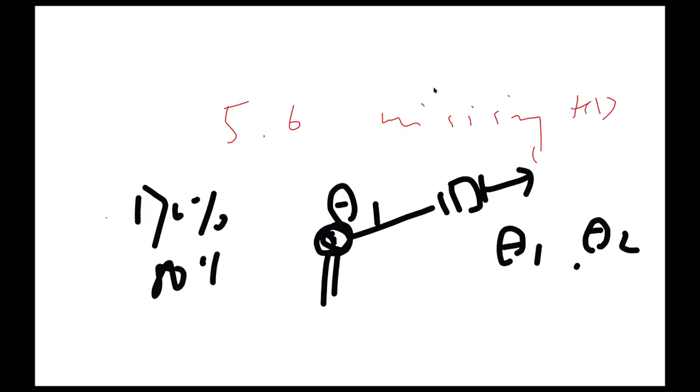We have a rotary joint, and then another one that's actually a prismatic joint. How come your Denavit-Hartenberg matrix has theta 1 and theta 2? There's only one theta, there's only a rotary joint. Maybe 70% to 80% of students in their homework 5 or 6 submission either miss the kinematic diagram, or they have the kinematic diagram but the Denavit-Hartenberg matrix uses theta 2. That's weird, you only have one joint, how come you have theta 2? So those students are completely not working on the material right now.

That's the part that's scaring me. Scary, okay, I actually got scared. Like the majority of the students are not even studying. That's the problem, okay.

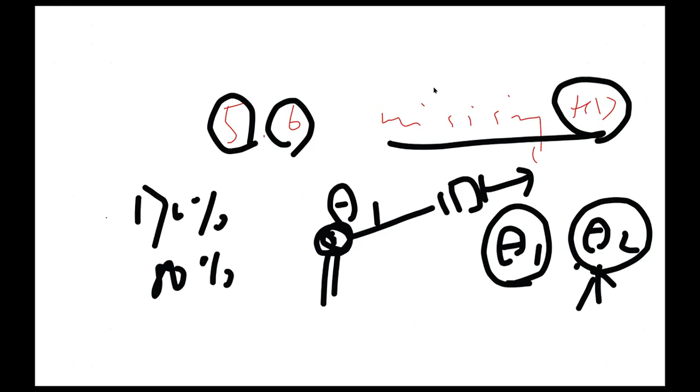So if you are a student who gave up studying, please work on it. This course is supposed to be an introductory course, and we've already tried to minimize the difficulty of the material. Also in terms of grading, I already made it very straightforward and simple. If you do work on something, even if you miss some numbers, I'm fine. I don't deduct points if you just have some minor issue in your coding or modeling. But if you totally don't want to try, then I can see it. Some students started to give up in homework 4, some started to give up in homework 5, okay?

That's not a good sign. In terms of so many years that I teach robotics, this class has the majority of students who give up early and just try to submit some garbage homework. That's the problem.

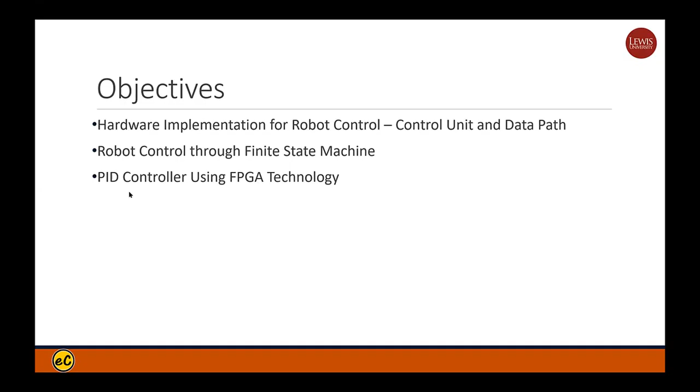Okay, so anyway, today we are talking about robot control through the finite state machine, and then the PID controller using FPGA technology. So first we talk about a finite state machine.

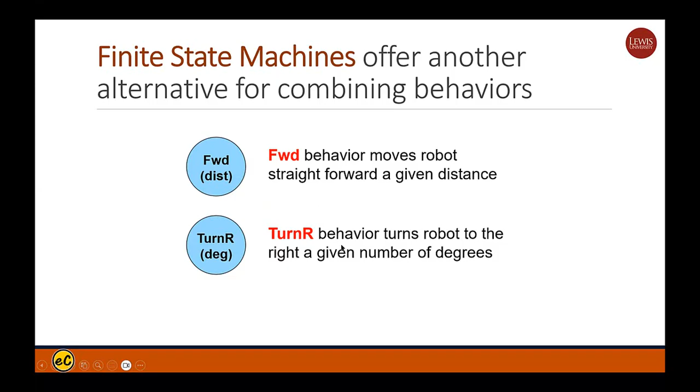So finite state machine offers an alternative for combined behavior. You have the forward behavior, you have the turn right behavior. Like this Pac-Man example, if you want to control it, it will go forward for 2 feet, then turn right 90 degrees, then forward for 2. So it's forward, turn right, forward. This is what will happen.

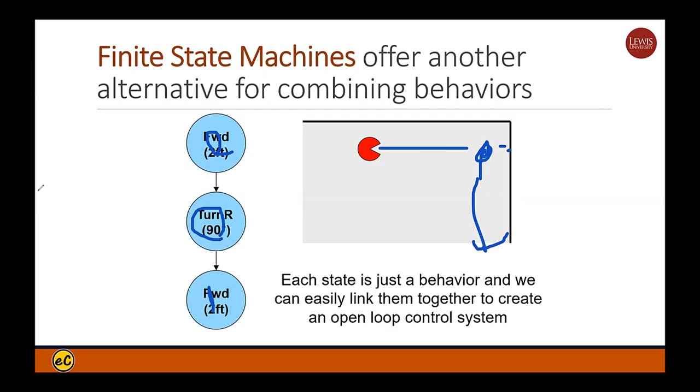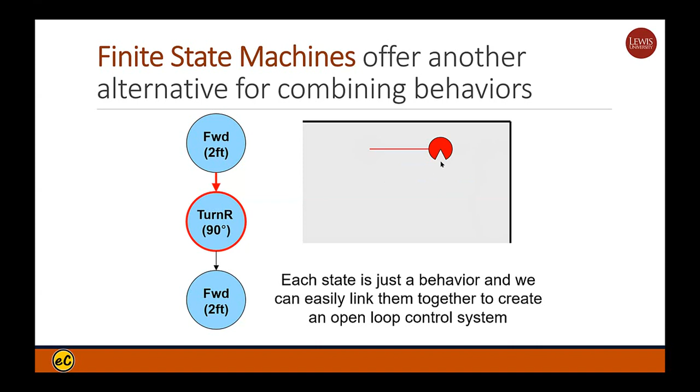And then there's a sensor needed, to sense if it's actually hitting the wall. So basically you start from there, you forward for 2 feet, and you sense there's a wall, and you turn, and you move forward again.

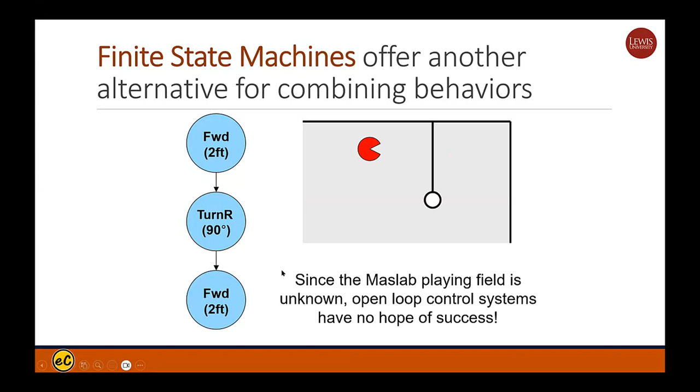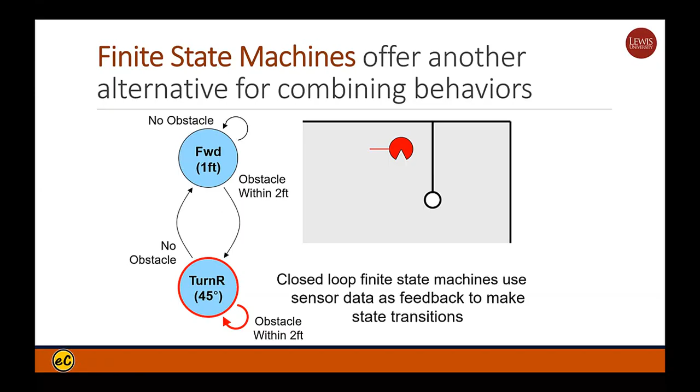So this kind of control just has 2 states. It can be implemented by such Java code, and you have 2 states. There is a sensor that will sense the distance to the obstacle, and then you change your state. These are the 2 things that you would do. Your state machine would be like that - a simple implementation of such a 2-state machine.

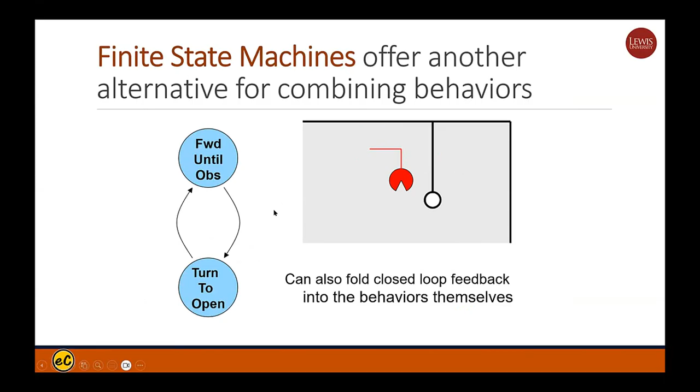So this is a very simple example, but it just tells you that you can use a state machine to control your robot movement. So a more complicated state machine is like this.

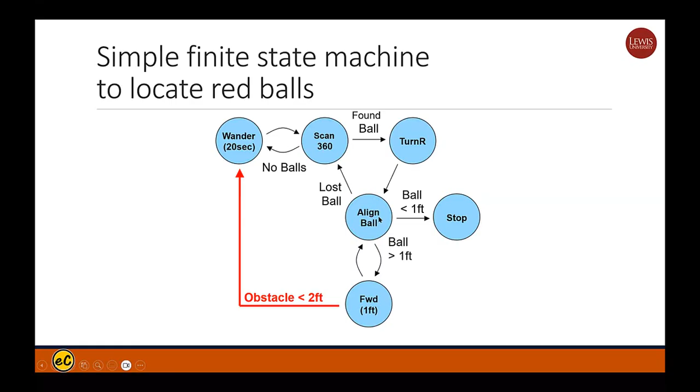You have more states, and then you will sense the distance, and see if there's a ball or not, something like that. So many states. Here you will go through this finite state machine control using some algorithm.

So you have a controller, you have a sensor, you have an image compute thread. The camera sends data to the controller to analyze the sensed data, and then the controller will take movement. So implementation-wise, it's like this.

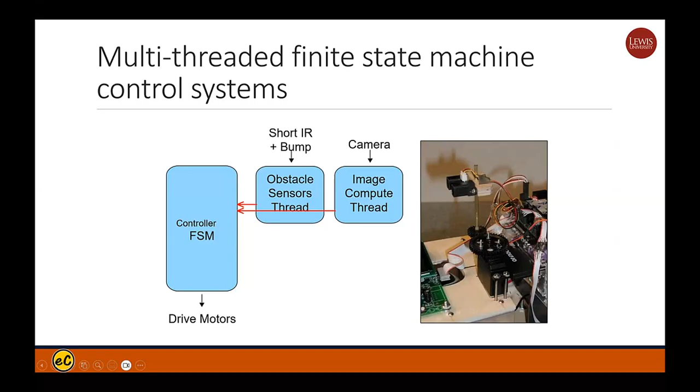And then you will control the servo. So the design of the finite state machine is in Python language or maybe Java language, depending on your implementation. So that's a simple finite state machine control. If you change your finite state machine control to a microprocessor, that's also fine.

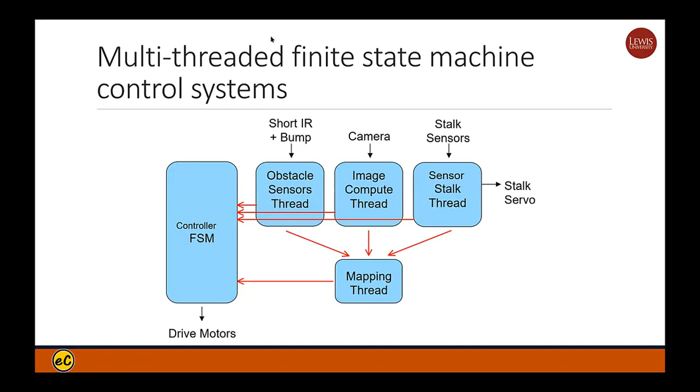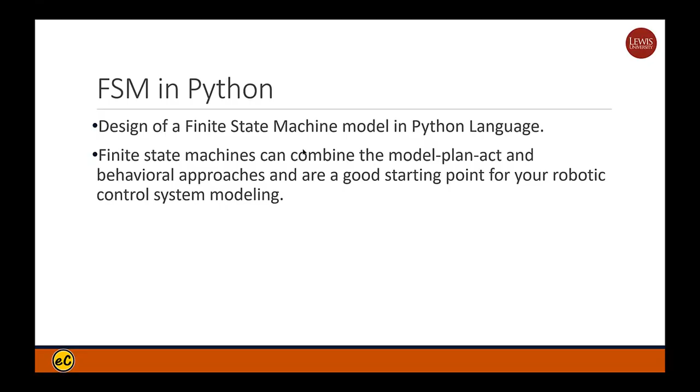Next one, we have the coding for the finite state machine model. Next we talk about a PID controller using FPGA.

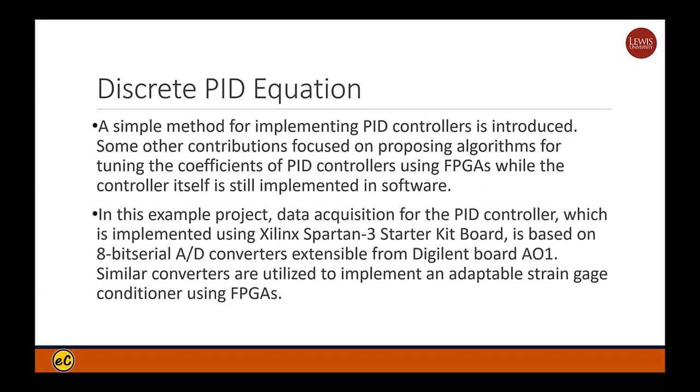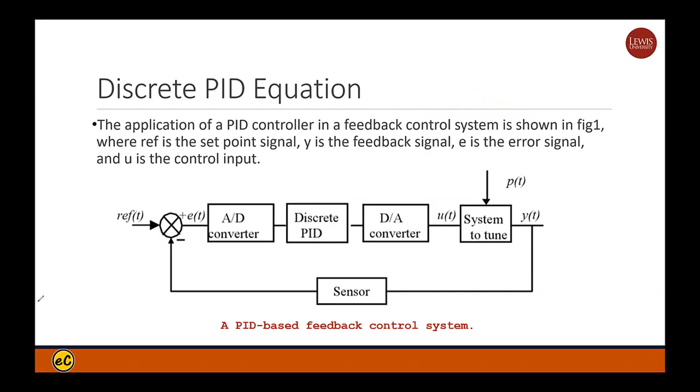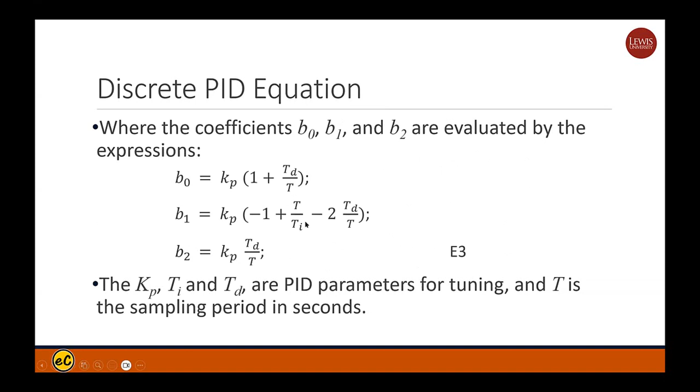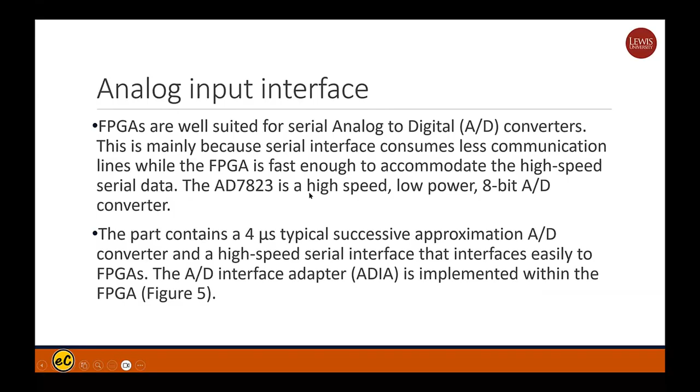This portion can be done discretely - discrete meaning the digital implementation using a difference equation. And then that one is broken down into the PID equation with a digital part, and you have many coefficients you need to work on. So after that, you can derive a digital PID controller architecture, and then implement it.

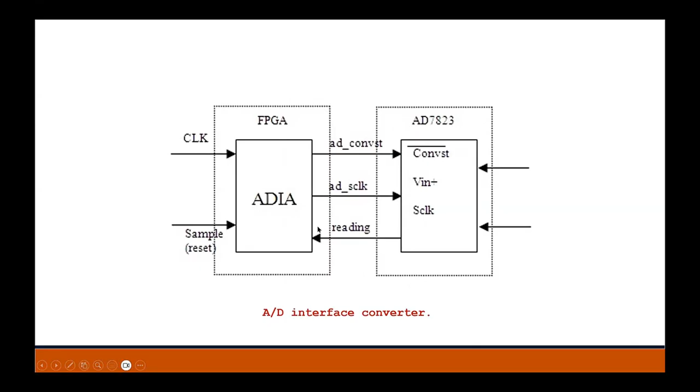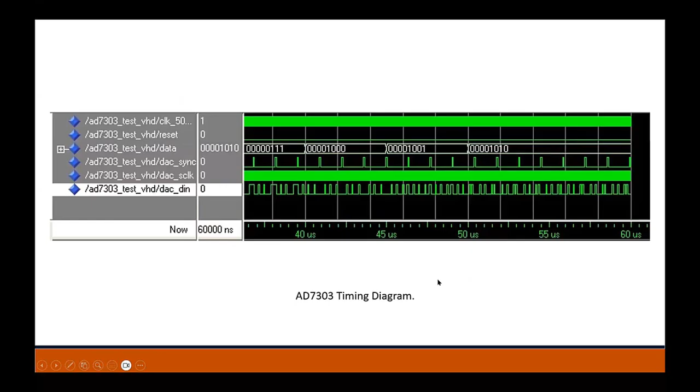You implement it into hardware. So this is one example, and then you use a timing diagram analysis to do a simulation and to debug it, for your FPGA part. And then you can send out a control signal at the right time to implement it. And finally, sum up the architectural result.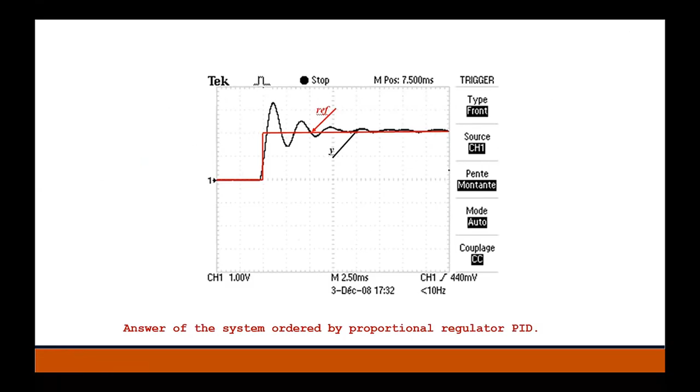So anyway, that's just showing you that when this is done in FPGA or the PID controller, you can have those kinds of performance. This is the high-level architecture in lecture 15.

So another one, the final one, is the robot architecture - we call it mobile robot. As you can see, this set of nodes - I totally have 16 lectures because originally this was designed to be a one full 16-week course.

Right now we are 8 weeks, so it's kind of 2 lectures per week. So we are shortened. The original goal is to build a courseware that can be shared by a 16-week semester and an 8-week per semester, but 8 weeks are supposed to work in a double effort accelerated format. Anyway, this one talks about mobile robotics.

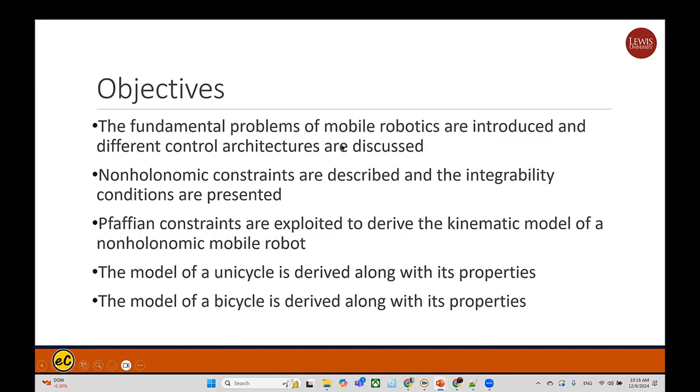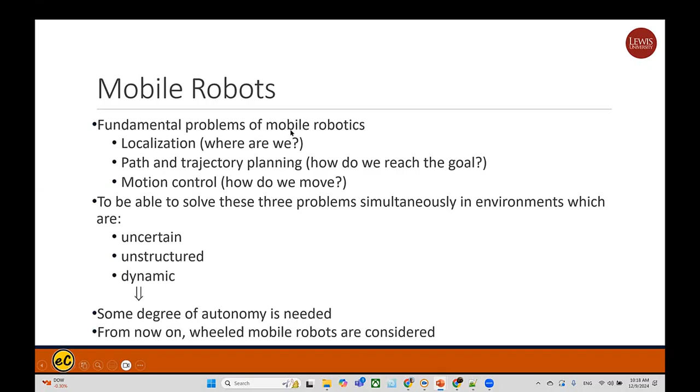So talking about its control architecture for the wheels, for the legs. This is called mobile robot. So mobile robot, you do need to sense the environment, and then you need to build up the environment control. So basically this is the control loop: sensor, planning, and then provide control, and then look at the environment.

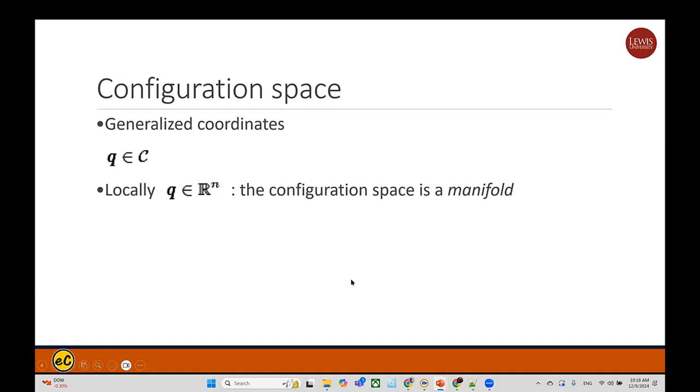So there are a lot of cases - let's directly jump to the case study. Right here we have a disk rolling on a plane. Disk rolling on a plane is that you control a single disk rolling on a plane, and then control is this small thing to turn to make a circle or something. This is called this kind of control.

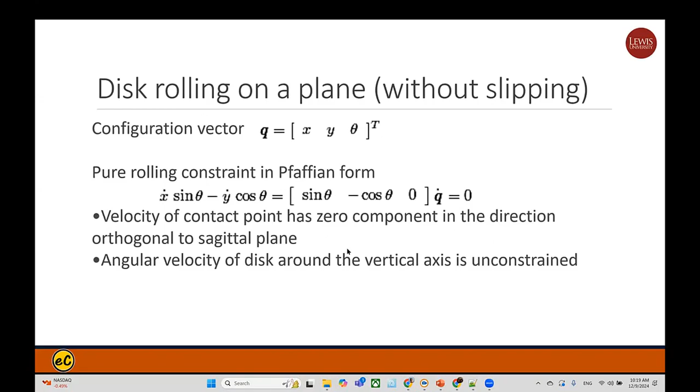So if you are using mechanical control, the response time is actually very hard to achieve. But since you are using digital and smart control, you set up the control variables to control it, and in fact this can be done nicely.

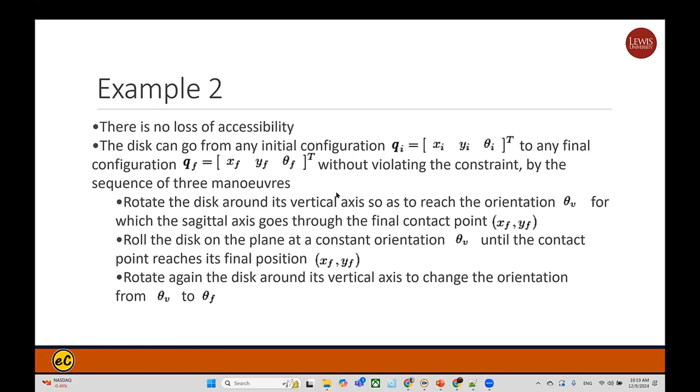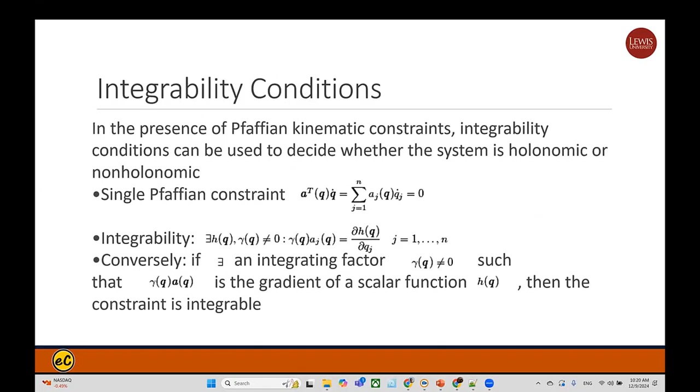Let's look at case number 2. Number 2 case is you need to set up the control variables for 2 dimensions. So that this rolling on a plane can be modeled. They have a lot of math anyway.

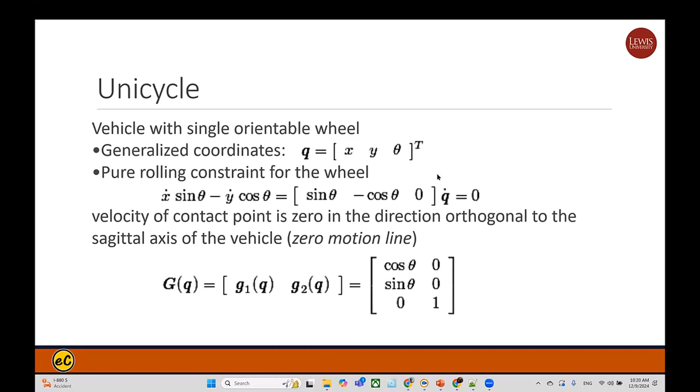And then next one is unicycle. Unicycle is like only one control cycle, two wheels that are not moving - it says tricycle, but only one wheel is actually providing the control. Usually this one is at the back, so you only have one wheel actually driving your car, controlling the direction. So here it gives you control over the unicycle - unicycle is the control when you move your tail wheel to control it.

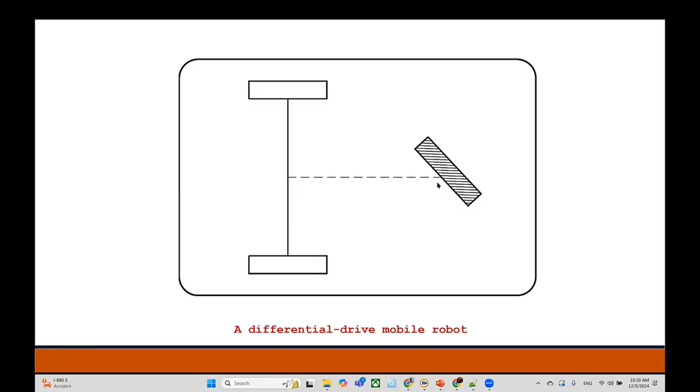Anyway, and then you may have three wheels, and all three wheels are moving or turning - this is called synchro drive mobile robot. So you may have three of them that are actually moving at the same time - that's actually called synchronized, because they turn the same direction at the same time. So in terms of math model, it's similar to the unicycle.

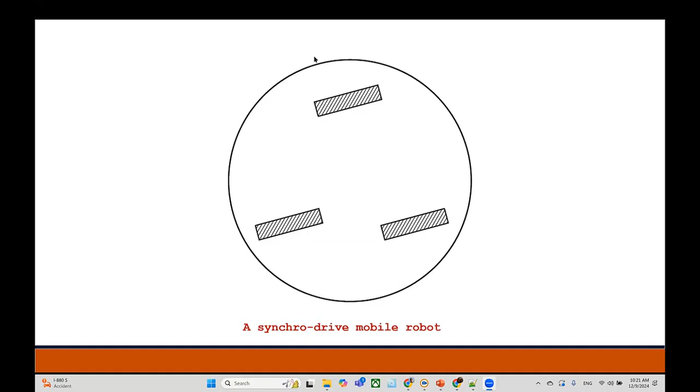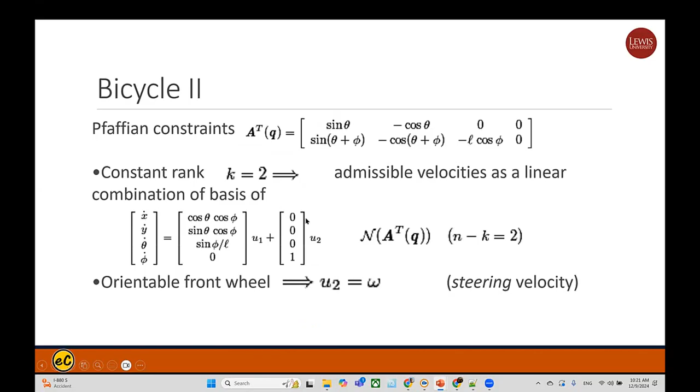Anyway, next one is a bicycle. Bicycle is that you have two wheels, one is controlling. And then you set up theta, length, and phi - these are something you actually work on, and then you perform the analysis. And then you get an equation for your control variable and the XYZ, something like that.

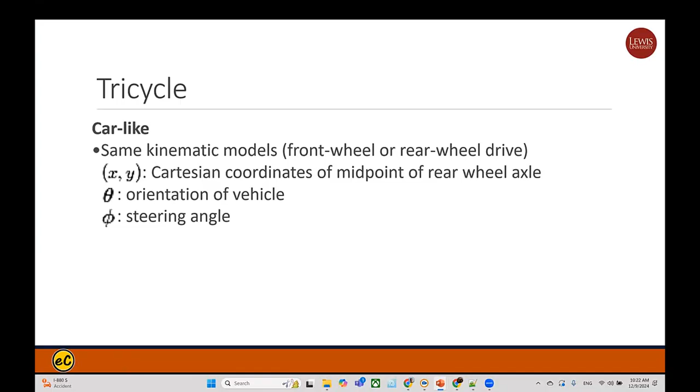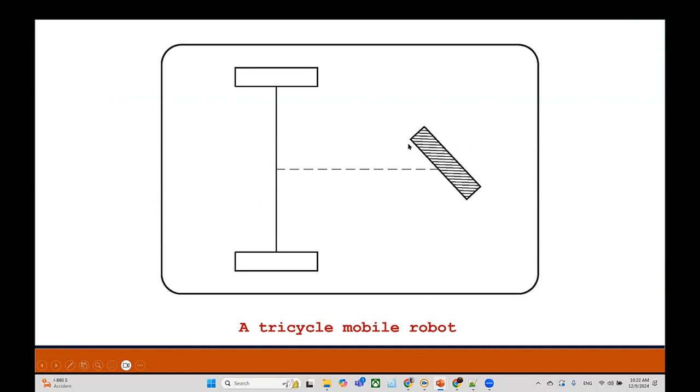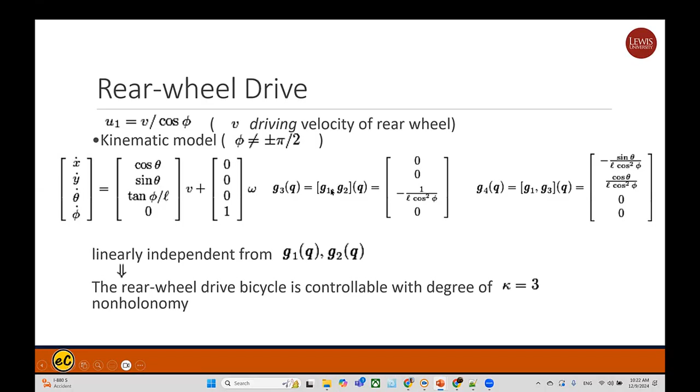So what we want to say is that no matter if it's a unicycle, bicycle, or synchronized wheel, what you usually want to do is set up your control variable and then link it with your XYZ domain variable. And you may also need to work on the differential equation in order to analyze them, and then you will get some mathematical model of how to control them.

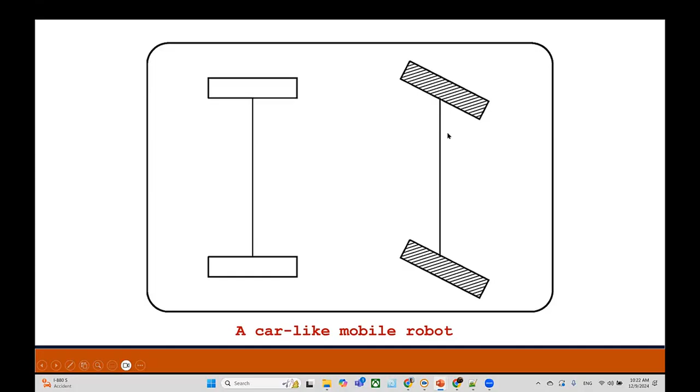So you also have car-like mobile - this may be front wheel drive or back wheel drive car model.

And that's about it today, that's what I want to say today. Let me check the problem question.

So the way I do grading is very easy. Each one of the selections is 1 point. If nothing is correct, I'll give you 1 point. Okay, if you have nothing correct.